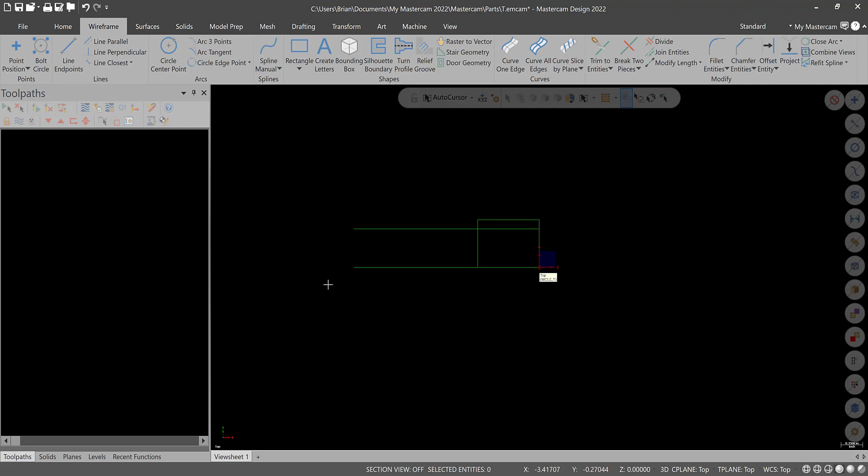Alright, so let's take care of our next diameter. Right now I'm going to go to divide and get rid of this leader line here, and I'll go to offset. Our next diameter is 1.220, so I'll go back into Mastercam. Distance 1.22 divided by 2. So click that up, apply, green check, and then let's take a look at the face. It looks like it's going to be 1 inch from this side or 2 inches from this side. So since I have this line drawn, I'm just going to offset it 2 inches from the right side. So I'll go to offset 2 inches from here to here.

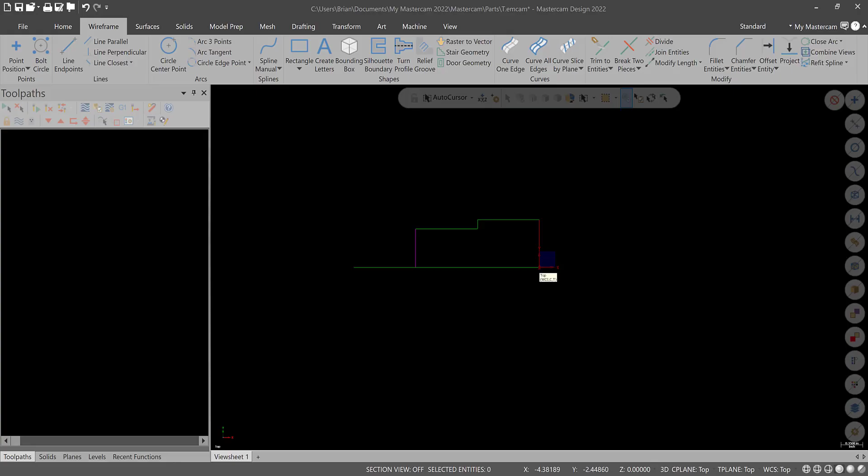And then I will go into divide and start cleaning this up. I will also clean up these details here so it sort of looks like our workpiece. Green check, and let's take a look at our next diameter, which is going to be 0.845. So 0.845 divided by 2, and offset this line up here. I can clear colors, finish up by just drawing this line, which we're going to be messing with in a minute anyways, green check, and then divide and clean up the inside of the workpiece. So now the OD is done and ready to be revolved, but we need to take care of the ID.

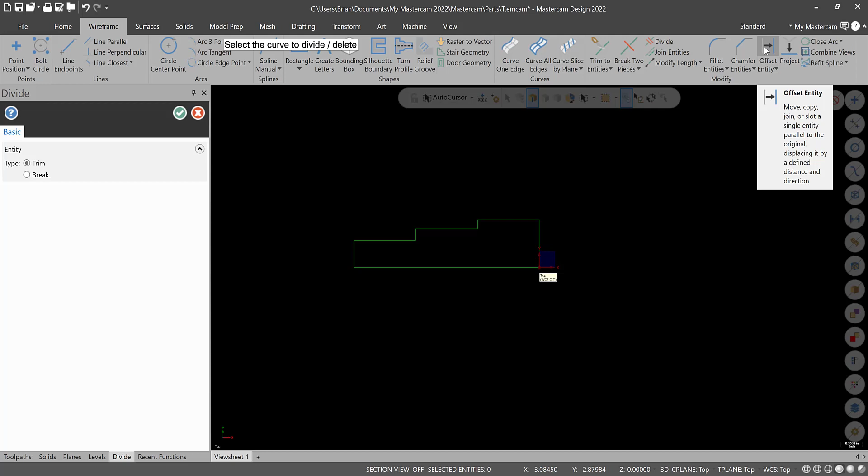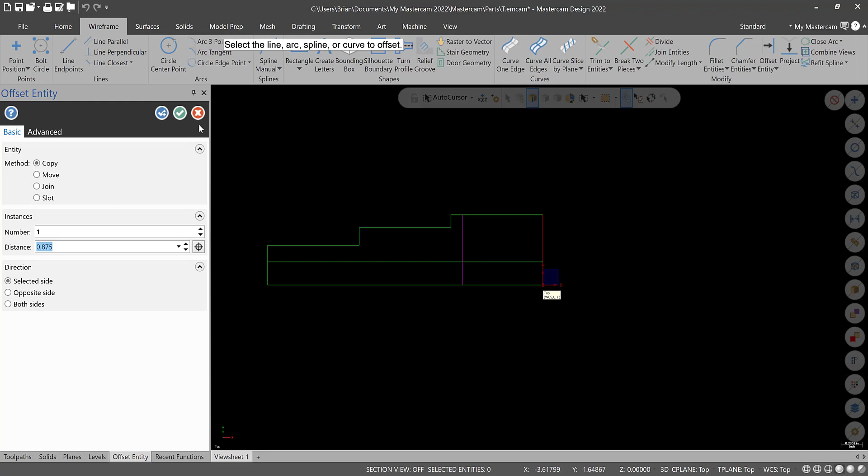Okay, so let's take care of the 1/2 inch hole first, because that's all the way through. So we'll go to offset and we'll type in 0.25 and offset this entire line up, green check. Alright, now I'm going to take care of this depth first. So the depth of this pocket is 7/8 of an inch. Okay, so we'll go offset 0.875 from this edge, and then we will offset up the diameter, which happens to be 1 inch. Right here. Alright, so we'll offset that up 1 inch.

The only thing I'm going to look at here, I do have to add this chamfer, but this R.40 max, we'll create that with the insert we select. I don't think any inserts in the shop are greater than a 32nd of an inch, so we're not going to end up drawing that in. We'll have to take care of this chamfer though. So we'll take care of the hole diameter. So we'll go to offset 1/2 inch, here to here, and then we'll use divide to clean up our geometry.

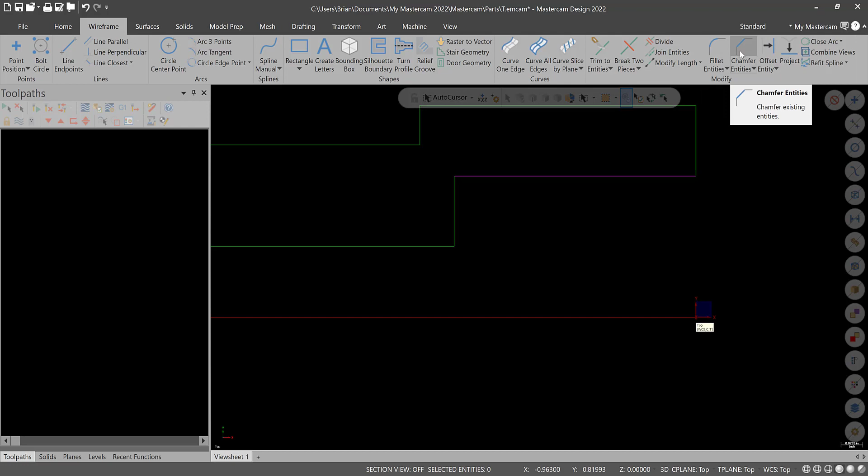So that is going to be what we're looking at. Last thing is this chamfer. So we'll go into chamfer entities over on the right here, and one distance is fine. The distance is going to end up being, if we look at the detailed view, 40 thousandths by 40 thousandths, so that's good. So that means that we can use one distance, that'd be 45 degrees, which works out.

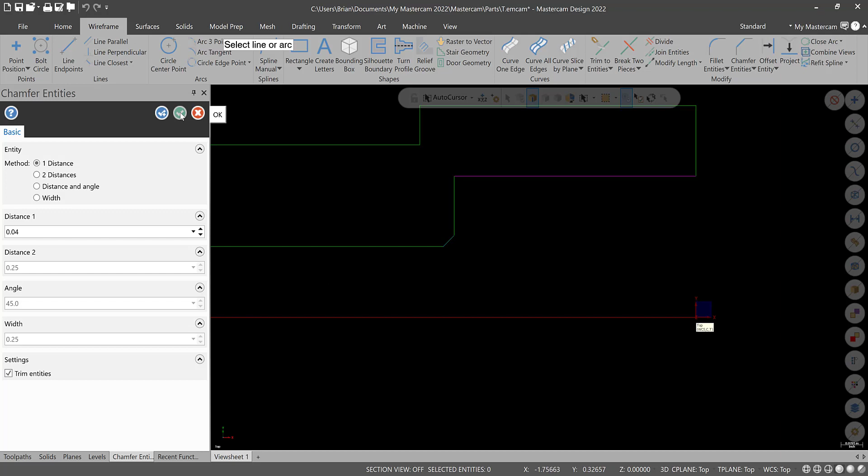So we'll type in 0.040 from here to here. Alright, and we'll hit green check. So that should be right. You could always check this stuff. Again, you could right click, go to analyze distance from here to that point, and we can take a look over in the specs here. It's 40 thousandths.

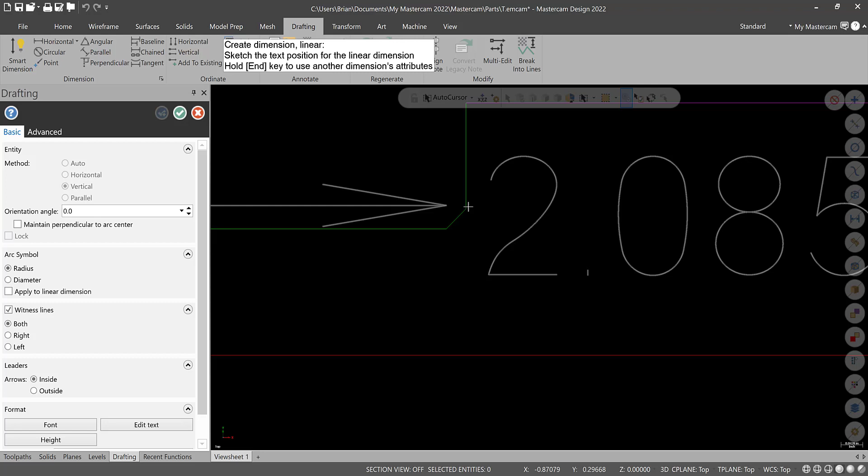All right, the other thing you could do, if you don't like working with that, if you go to drafting, you could force it to vertical from here to that end point. And if it doesn't snap, like it's not working for me, sometimes you can end up just going to vertical, and make sure you select the end points from there to there. 40 thousandths, so that's correct. And you could leave those on sometimes if I'm working with this. It's not often, but with drafting, usually I'm using angular a lot.

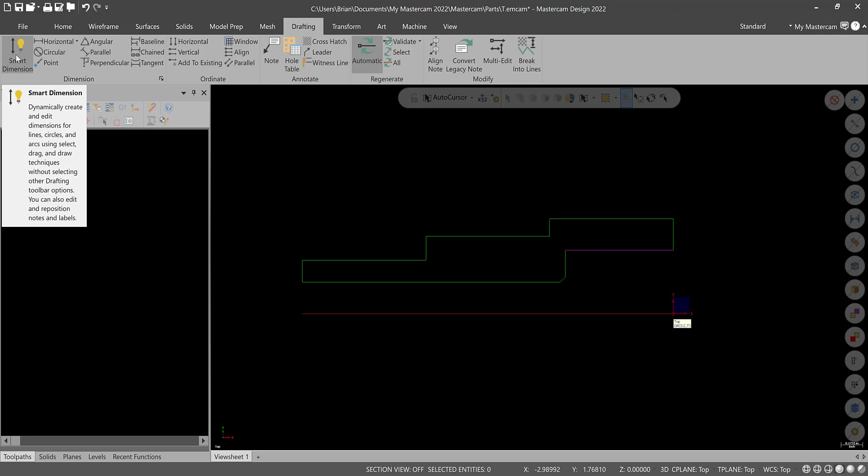But you can go in here. I also use a hole table as well. But you could leave these on a different level to help you in your part process. Not something I do a lot. It depends on the situation. But don't be afraid to use these. You can consider drafting sort of like, it's not like smart dimension. Even this smart dimension is not quite. It's not like SolidWorks or a parametric program or parametric type modeling. It's just not like that. I don't end up using that a lot.

If I want to change the length of something, you should just right click and analyze entity properties. You can update it in here. But even then, sometimes it is faster to delete it. It depends on your methods. So I wouldn't quite worry about that, especially with something this simple. So that looks like that's pretty much right. I don't see anything I'm missing. So let's get ready to revolve this.

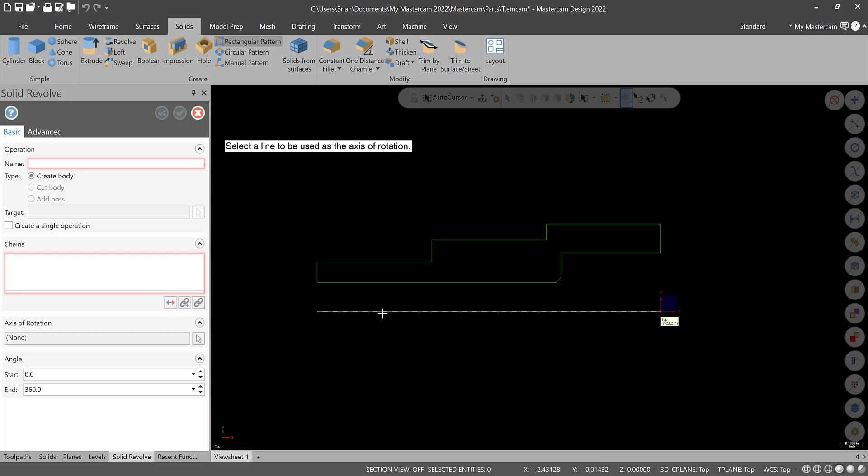So what we need to do is go into Solids, Revolve, and we're going to select this outside, okay, and hit green check. And then the next prompt is select a line to be used as the axis of rotation, which is the center line. And we get a good preview of what we're going to be doing. So that looks good. We will now hit green check. And this workpiece is essentially ready to machine. So we'll put a little transition here, let you catch up, and we'll come back. We'll probably start by flipping this around and start to get into our toolpaths.

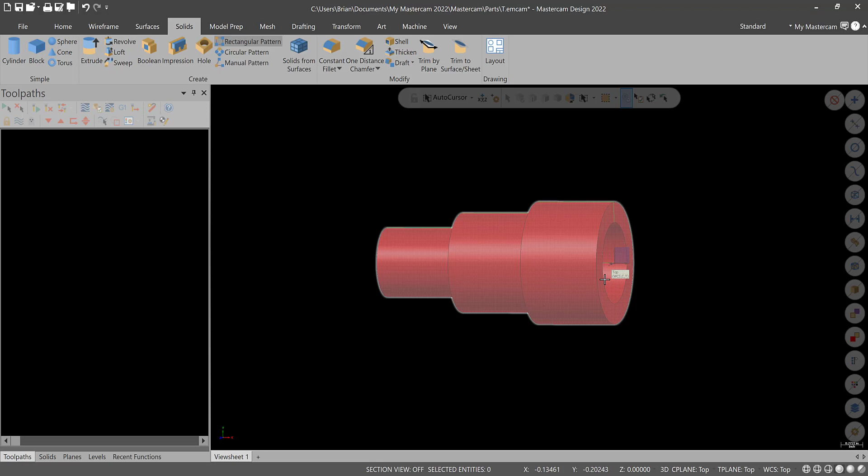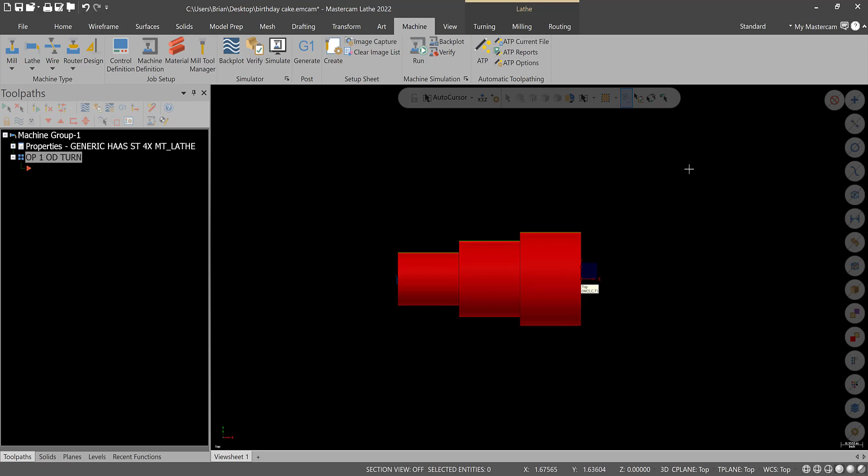Alright, so let's get ready to turn this. You'll see I already have a machine group. I selected the generic Haas ST 4-axis lathe post. That is available on Blackboard. Machine, lathe, make sure you get the generic Haas ST. Don't use default. This will be fine for what we're doing, tool room lathe or the turning center. They take the same programs. We're going to be programming like a turning center though, so from the back side of the workpiece.

So for turning this OD, I just labeled my first toolpath group as Op1 OD turn. I also have my levels set. I want to set the solid as level 2 just to break it up. So this will be part, and level 1 will be wireframe. Okay, so I'll hide the wireframe for now. We don't need that. So let's rotate the workpiece around.

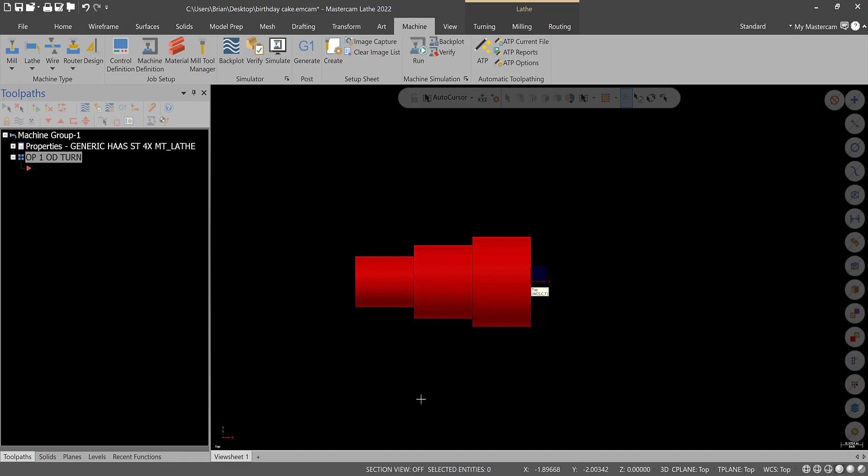So select the whole workpiece, and actually before you do that, make sure you got the wireframe too. So select everything, because you don't want to lose that. That'll give you one of the errors in the solids. You have to remove solid history and all that kind of stuff. So let's just move it together for this example. Go to dynamic, select this side, rotate the part 180, and then bring it over in the X, -3 inches. Alright, hit green check, that's what we're looking at. Alright, clear colors. And then I am going to go into levels and turn off the wireframe.

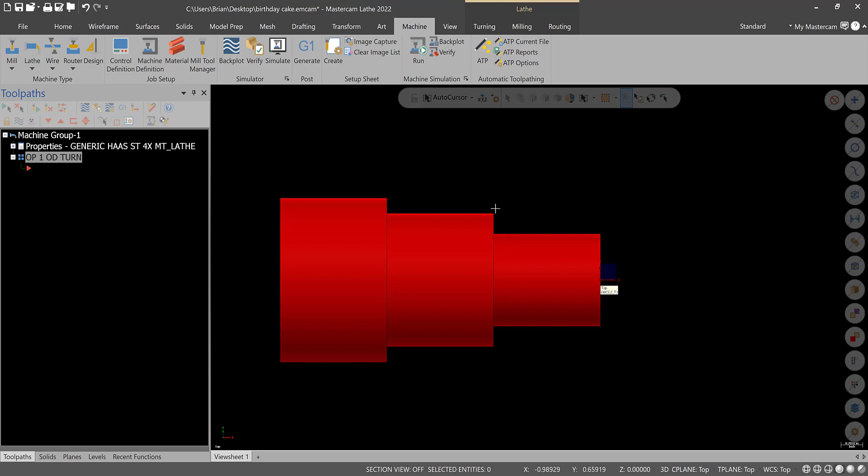So for right now, we need to think about not only our stock setup, but also, I like to deburr the workpieces in the machine when I can. And one of the simplest ways to do that is to draw the chamfers or radii on the workpiece. So what we're going to do is draw a little radii, 15 thou radii on each of these corners. So we'll go into solids, we'll go into constant fillet, select the diameters, not like that one. So go back into constant fillet. You could have hit clear selection, but I hit escape out of habit.

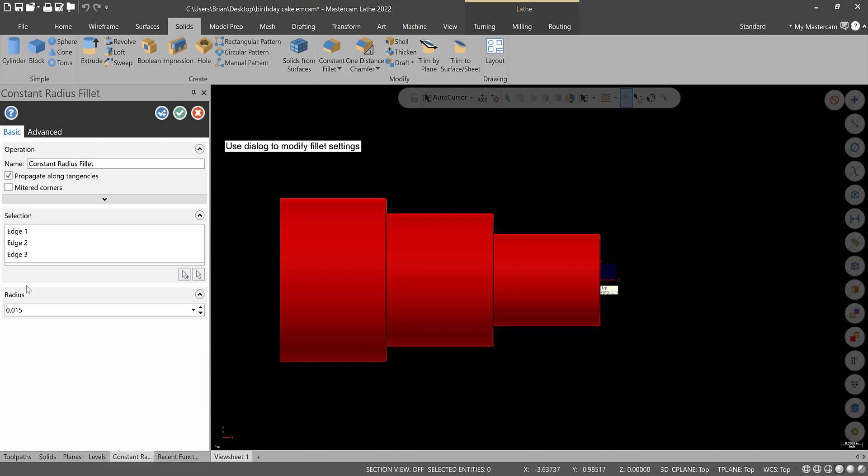Then hit end selection. And the fillet's going to be 15 thousandths. Okay, that's green check. So now we have a part that will be deburred after the finish pass, nice and smooth. So we'll go to top view.

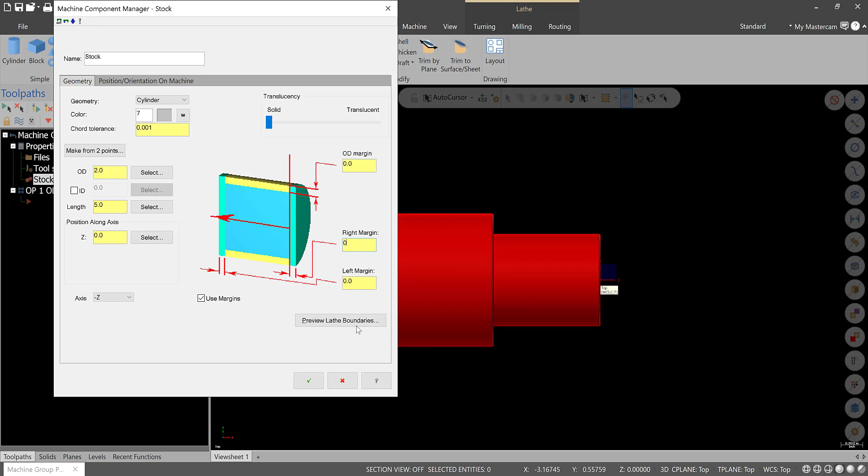So we'll preview lathe boundaries. Looks good because we are facing the 0. So we'll hit green check. Next what we're going to do is go define the chuck jaws. We'll make sure that we are from stock. Gripping on 1.5 inches should work. We'll preview lathe boundaries. That looks good. Enter. And we are pretty much set up.

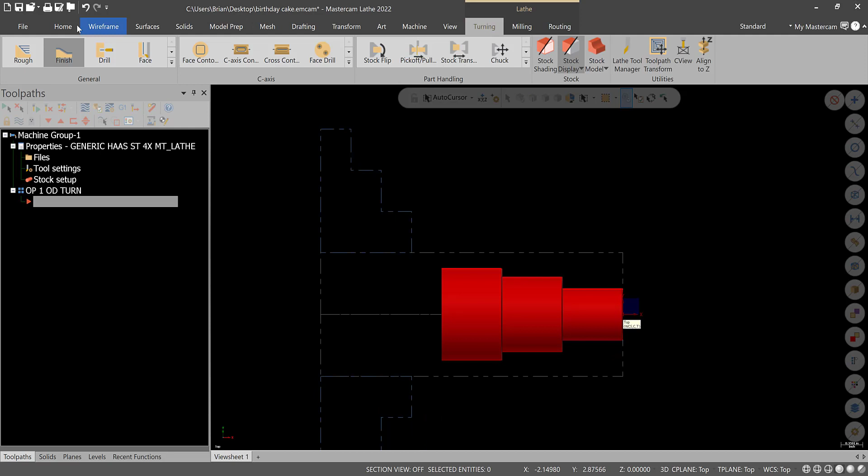So now we'll get into our turning operations. So we'll start with a facing op. We'll select our CNMG 80-degree insert. Spindle speed 200, slow. We'll just go to 500. That's still slow, but it'll be good for people learning how to use the lathe.

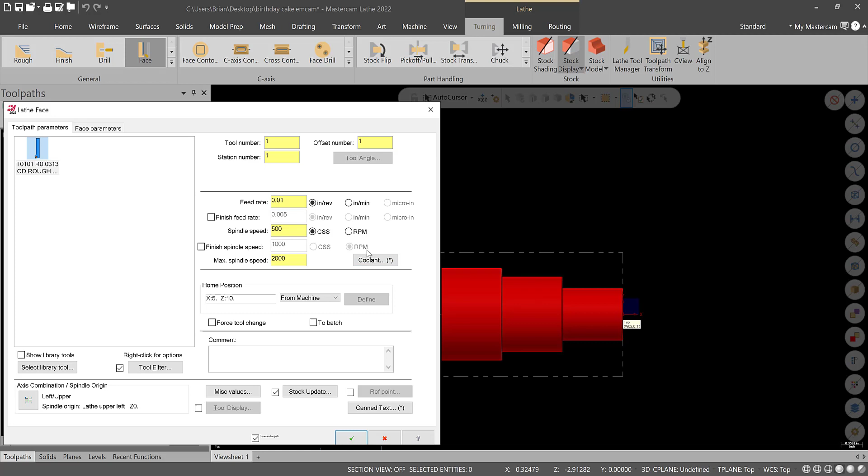Max spindle speed of 2,000. I might even reduce that depending on when this is assigned in the shop, but for a programming class, that is fine. Feed rate of 10 thou should be okay for us. I don't think we'll get too choppy of a finish. It is only aluminum. Coolant's on, that's good. Facing parameters, everything there should be fine. We'll hit green check. There's our facing op.

Alright, so let's rough the OD of this workpiece. So we'll go to roughing operation. We'll carefully select the first radius, change direction, and bring the chain over to the end of the workpiece here. Hit green check. Use the same tool. We will limit our max RPM to 2,000, spindle speed of 500, and feed rate of 10 is okay for this roughing op.

Rough parameters. We'll do a 50 thou depth of cut, and minimum depth of cut of 1 thou. We're just going to use equal steps so that it won't affect us. We'll leave 10 thou on X and Z. We'll have to be careful of the Z later on with the finish tool. I'll show you why. First thing, stock recognition. Make sure that is use stock for outer boundary.

Lead in and lead out. The lead in is probably going to be okay. The lead out, I want to extend it by about 1/4 inch to allow for the parting tool. Not a big deal, but it does help. Otherwise the parting tool could hit the shoulder and things like that.

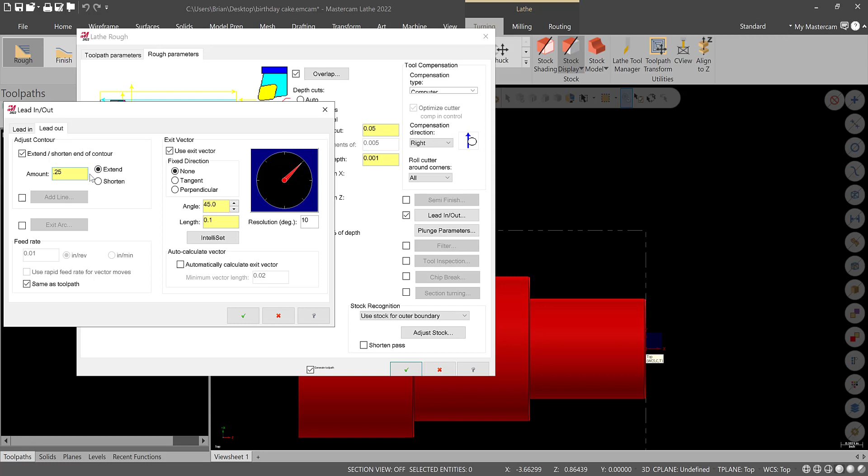I end up thinking if you're going to part it off and you're turning from a larger piece of stock, you want to part off the turned material, not necessarily from the OD of the stock. I don't know why you'd want to do that, but there's a lot of variables here, so this is what we're going to do for this one. So lead in, that's fine. That should be good. We'll hit green check.

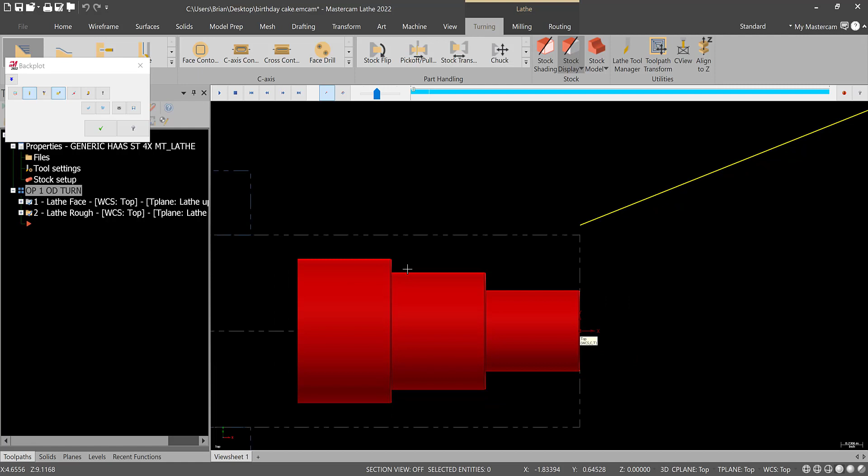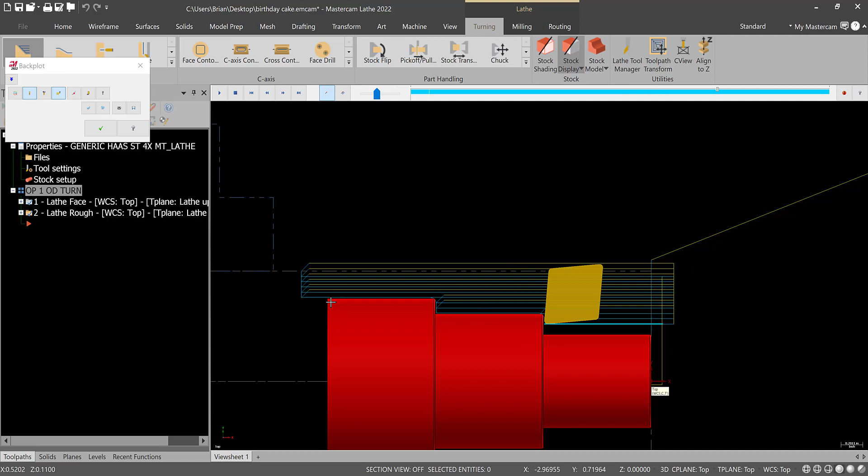Alright, looks pretty good. We'll watch both of these run in back plot now. So here's our facing op. I'm going to slow it down so we can actually watch it. Here's our facing op. Sometimes you pause and I just go S. S and B. So that looks good. Roughing past the workpiece. That should give us room for our parting tool. Looks good.

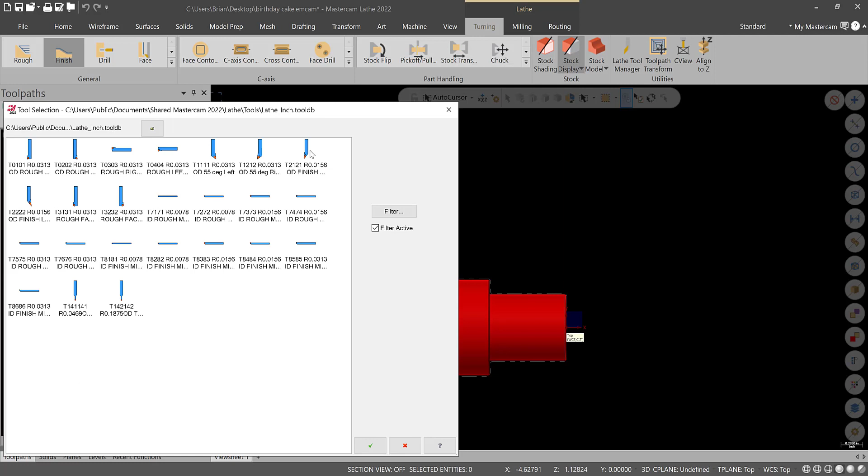So now let's do a finish op. So I'll hide the visualization of those two tool paths, and I'll go to finish. Same chaining as the roughing. Green check. And for finish parameters, for the finish tool, I'll use this 35-degree tool, just to have a tool change in this operation. Spindle speed, constant surface speed of 500, max 2,000. We'll go to a 3 thou feed rate for finishing. Everything here should be okay.

The only thing that's going to change is going to be lead in, lead out. The lead out will extend it, but only by 0.240. And the reason for that is we go 250, since we left 10 thou on the faces. And actually, let's just turn that off for now, and I'll show you that. So we'll hit green check, and let's change that to 250.

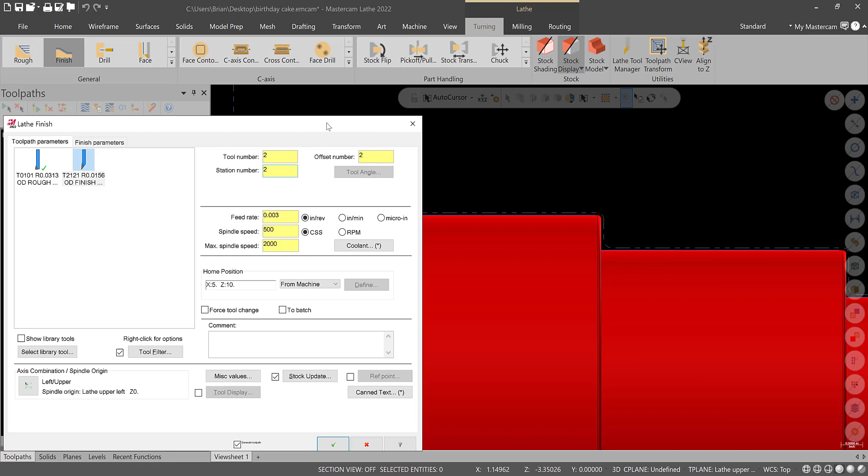That's what we did with the first one. So let's make a match 250. The other thing I forgot about, this needs to be tool 2, so sorry about that. And station number, I would make a match. We don't have station number issues with our lathes at the college, but that'll work for us. Green check. So notice the tool is actually going past a little bit.

So if we go into home and analyze tool path, and you'll see, if I move this thing out of the way, look how far the tool is going into the stock. See how it's gouging? It's going to squeal. That's a common mistake people make. That is because in the roughing we left 10 thou on the faces. So if we go back to parameters and lead in, lead out, change it to 240.

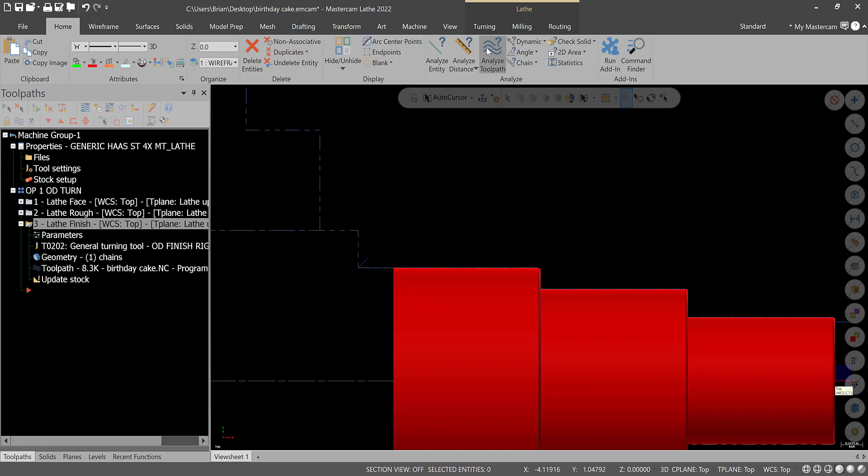And then if we go to our analyze tool path and put the tool right at the end, you will see that where the tool's doing the work is lined right up, right there. Okay? So that's important. It's not the end of the world, but it does make a difference.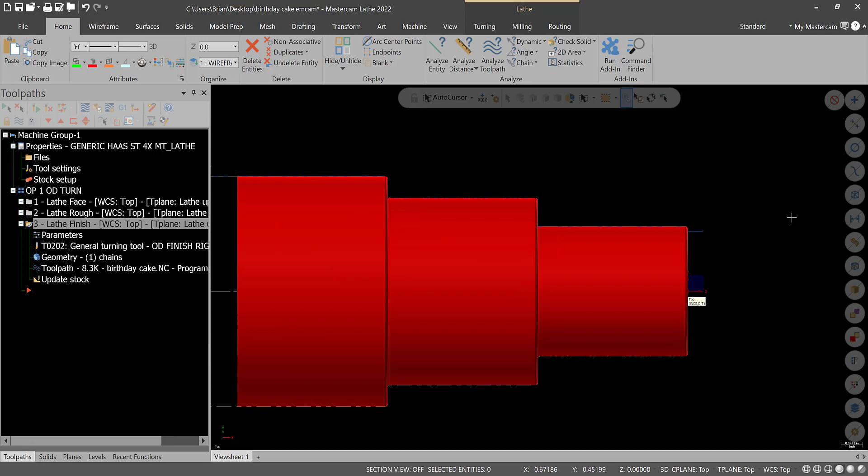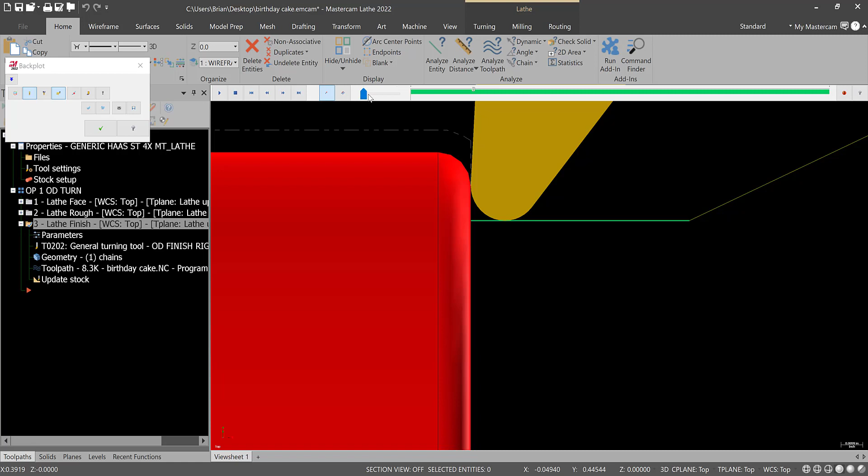So we're good there. Okay, actually, if we look at this tool path, and just look at it in backplot to make sure it's flowing right. So it goes right to the edge, works around the workpiece. If I slow it down, you can watch it run. Looks good. Alright, now we could change the lead in and things like that, but I think it's okay for this operation.

So this part is turned. Let's take care of the parting. I'll transition here. Alright, let's take care of the cutoff operation. So go to turning, and we'll go to the cutoff op. And I want to select the boundary, but you can't just go over and select this diameter because it's going to go to the center and you're going to have crash issues.

So in situations like this, you have two options that I usually use. One is going to be draw a line here and then select the end of the line. The other one is just hit the spacebar and then this little window up here comes up, and then you could type in where you want that point, and you could draw geometry this way. It's sort of old school, but it does work well. The first number you type in is X, second is Y, third is Z. They're all separated by commas.

So we're going to go minus, if this is 3 inches, 3.015. And I want to leave it a little bit long because we are going to face this back side and up too. So leave it a little bit long because we are going to have a spud in the middle. We're going to end up programming this to part off in Mastercam. We would change it at the machine if we were going to leave it attached to break off by hand.

The reason for that is when you work with the stock flip in Mastercam, it doesn't flow well. You can work around it, but it's a lot easier as far as Mastercam programming to, I guess, fake it out, which I don't like to do, but in this situation, it is definitely going to be easier for us.

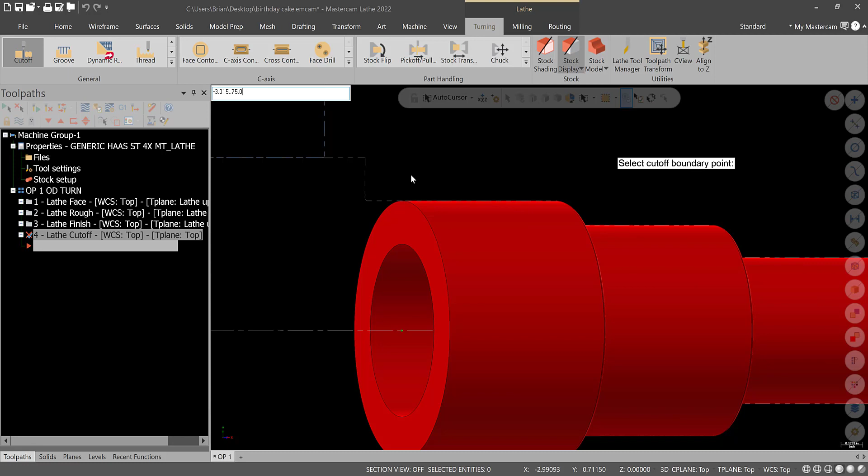So X is minus 3 inches plus 15 thou, comma, in the Y is going to be 0.75, which is the OD of the workpiece, and then Z is comma 0. So hit enter, and you'll see, we move this out of the way, top view, that point is right there. So that worked out well.

Now, for the tools, I have the parting tools selected. So if I get back into the lathe tools, that's lathe metric, lathe inch right there. And I have this cutoff tool selected, 1/8 of an inch. Now, the grooving tools could work.

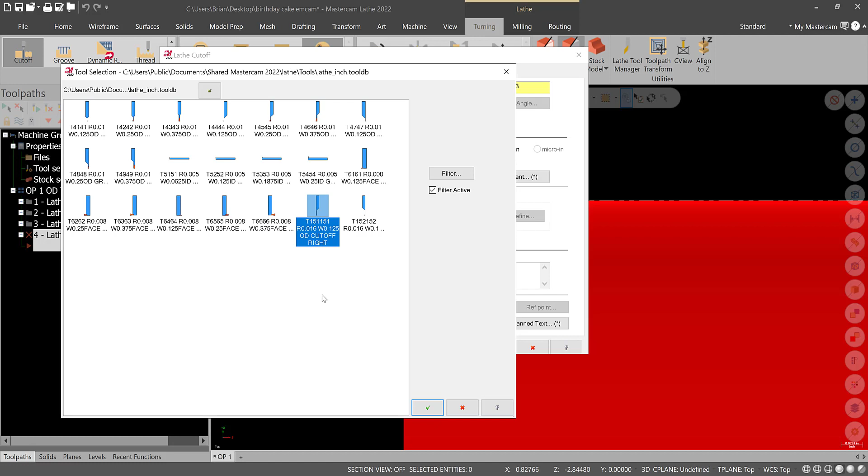The question with grooving tools is typically they're not as long as a parting tool. This part's not that big a diameter, so we can get away with a solid shank holder. Any diameters larger than 3 inch, you really need a blade style holder, and I can show you those in the shop if you have any questions, but this will work for us.

So hit green check, and I already have it in there, so I'm just going to X out of here and just delete that one. And I already renumbered that tool 3. I'm going to go inches per rev, 0.0025, spindle speed, 200 max is going to be, let's say, 1,000. And we are not parting all the way off. When we get to the machine, we'll change the X value in the part off. So 1,000's fine, it won't throw the workpiece.

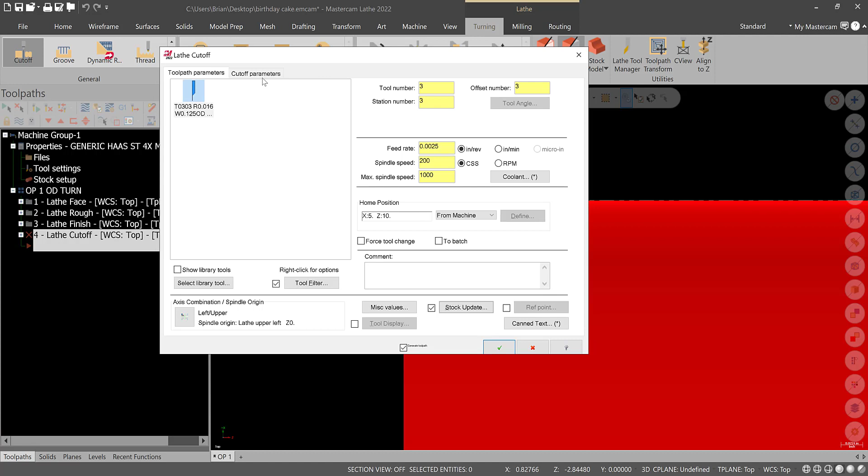All right. So the other thing is in stock update, we want to make sure that we keep the separated piece. That's what we want to keep. We don't really care about the remaining stock over here, so hit green check. Cutoff parameters, everything here should be okay. From stock is good for entry. Corner geometry, we'll put a radius of 15 thousandths. Now I know we're going to end up facing that, but it's nice to not have to handle a burred part. Lead in, lead out should be okay. I'm not going to bother pecking for this workpiece, so we'll hit green check.

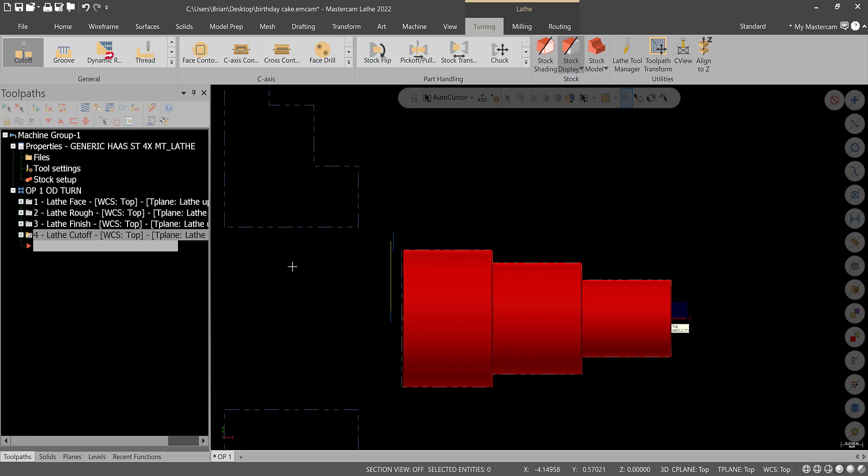And that is what we're looking for. So if we backplot this, notice this part is gone. This is all we're working with. That's the stock. See the gray sort of dotted line around it. And that's the reason why I don't program it to leave the spud. You can, and you could do stock models and work around it. The default jaws don't necessarily simulate right and things like that. So it's just easier to do it this way.

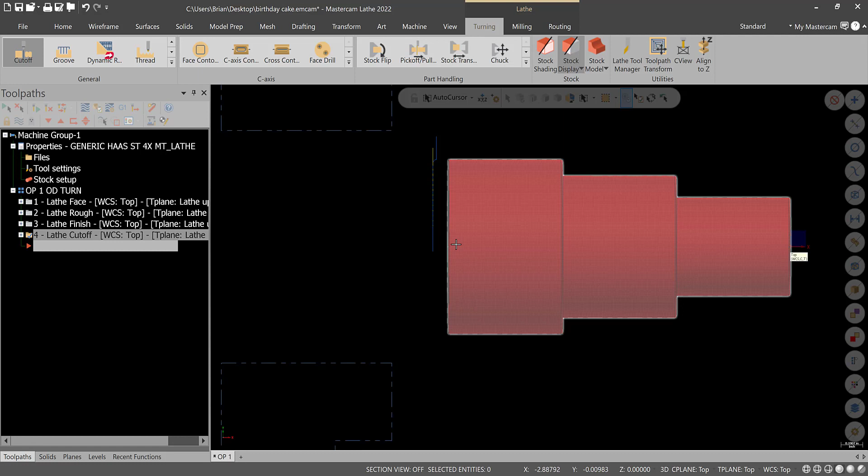And then if you want to break this off, leave 200 thousandths diameter here at the machine. So you would change the X value in the code, and that would be after posting, obviously. And then you can just break it off by hand, and then the same programs work later on. So from a Mastercam standpoint, this is what I would do. I would just change it at the machine tool. So let's go ahead and backplot this. Make sure you don't have any issues. Looks good. So good time to save. And let's verify this now.

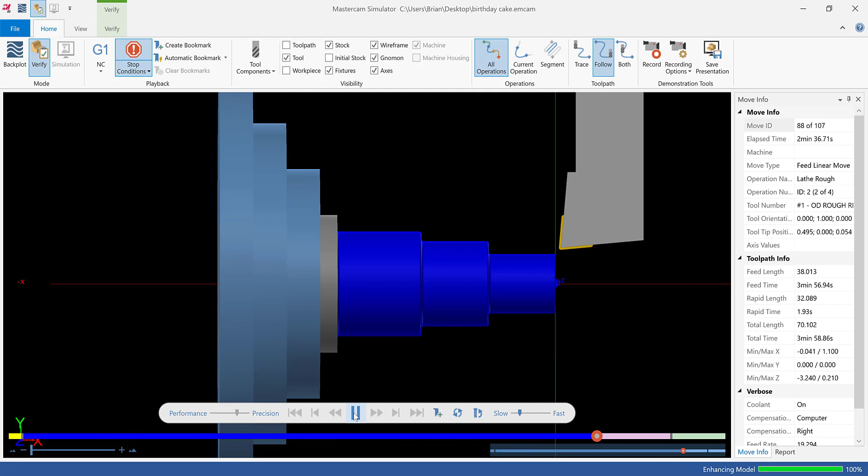All right, so we're in verify. I'm going to slow it down quite a bit, and we'll take care of the facing, the rough turning, finish turning, and parting. So there's our workpiece. All deburred. There are no sharp edges. And now we're ready for our stock flip operation. So again, save again, and I'll transition here and we'll take care of our stock flip.

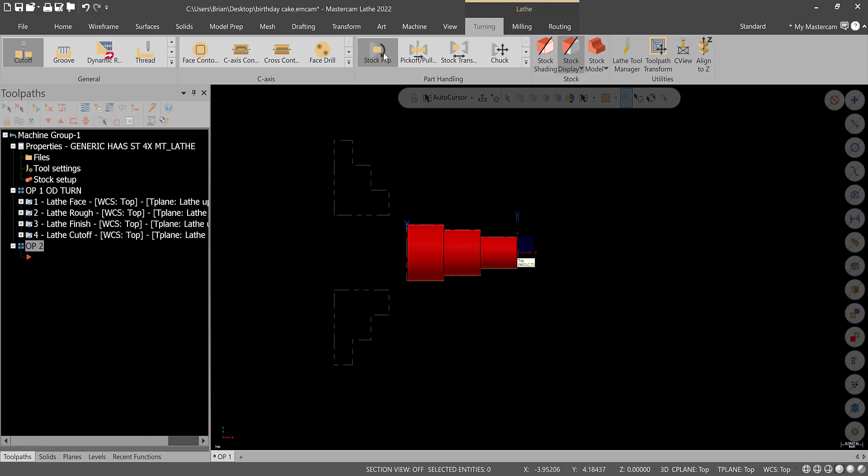Alright, let's take care of the stock flip operation. So let's reposition the workpiece and the jaws. So let's do a new toolpath group. And let's just name it Op2. And then we can go to the part handling operations, go to stock flip. Alright, for the geometry, we've got to make sure we select everything here. So make sure you go to levels and make sure both are on. And I'm just going to window and highlight everything for this one. Offset levels by 10 is fine.

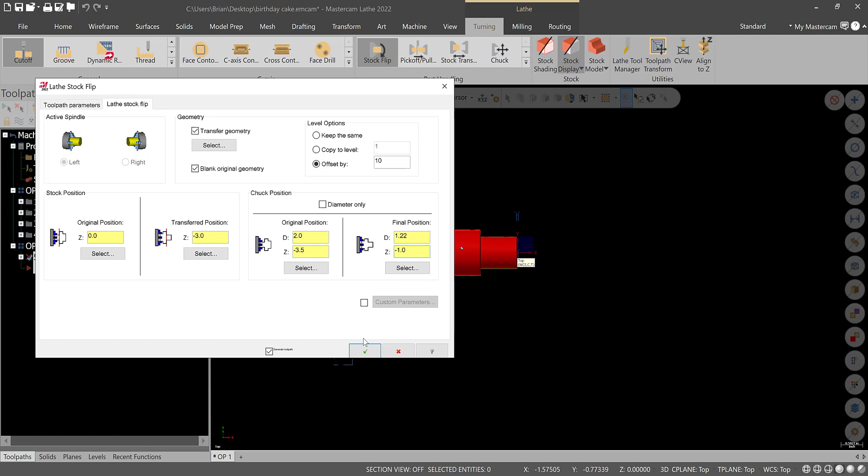The transferred position should be minus 3 inches. We'll double check that. We can always go back and tweak this. In the final position, the diameter is going to be 1.220, and it'll be minus 1.0 because we're going to end up grabbing on this diameter right here. So let's hit green check and see what it comes up with. All right, looks pretty good. That's exactly what we want. Make sure that your top gnomon is on the part and not the stock itself. Make sure that stock is hanging out to the right, because that's going to be what we're looking at. All right, so that's good right there. So there's our stock flip operation.

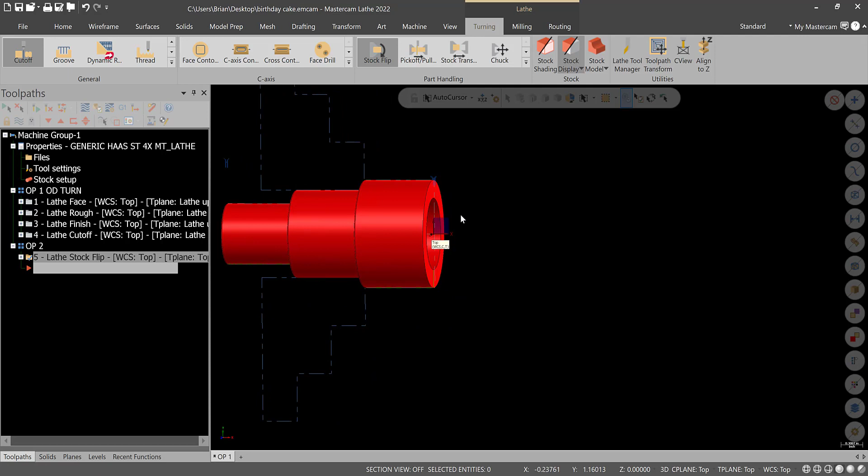Good time to save. And now let's just do a quick facing op. All right, so we'll go to facing. Select that tool 101. The speeds and feeds from last time should be okay. Face parameters should all be okay. It should be the same as last time. Hit green check. We'll backplot this. Looks good. So there's our facing op. So there's our stock flip and face op. Good time to save. And I'll transition here, just allow you to get through the stock flip and the facing. Come back and we'll spot drill, and bore this hole and finish up this workpiece.

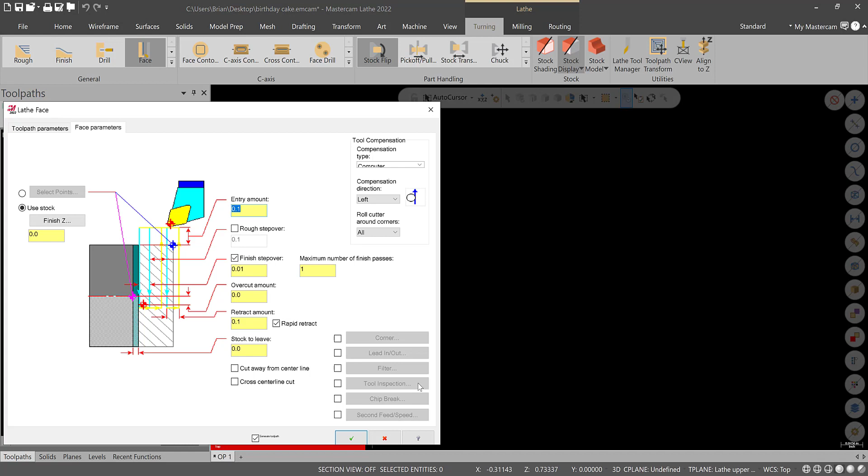Okay, so one thing I forgot to do on this is take care of this corner, because I want to deburr that. We don't have to draw geometry in this situation. We can go into the lathe face operations, go to corner, and we'll put a radius of 15 thousandths. Make sure it looks just like that one, and then hit green check. Okay, and let's watch this run.

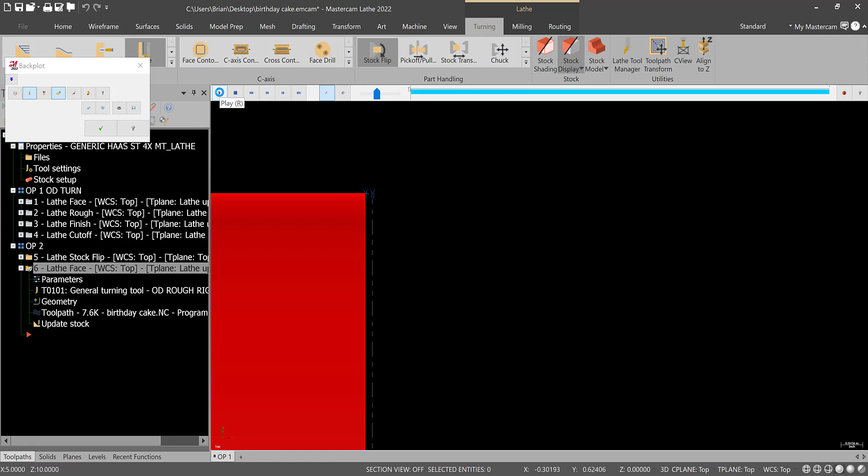Actually, I'll stop and hit S. See how it forms the radius? If we go to wireframe in the bottom right, you'll see it form the radius. That's what we want.

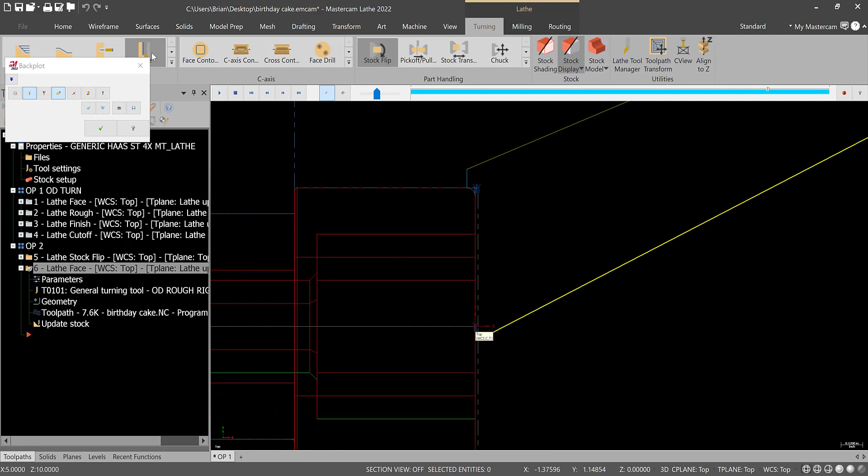That'll deburr the workpiece for us quickly. All right, it's just something different there. Go back to solid.

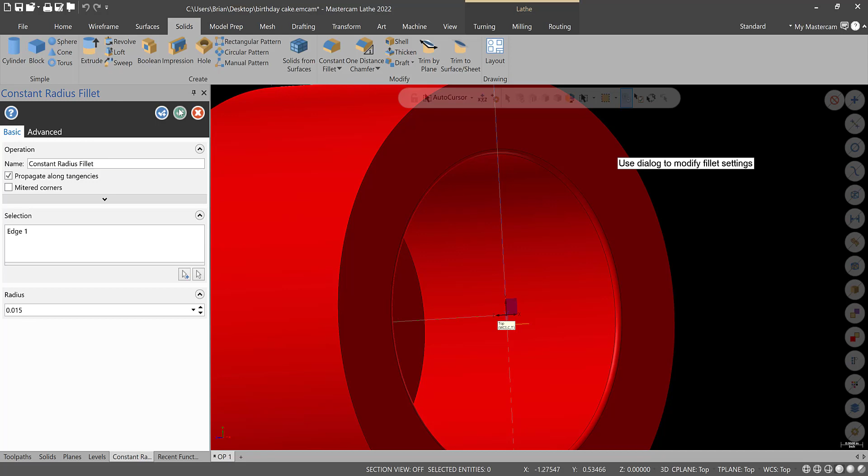Now we got to start thinking about, while we're on deburring, what we're going to do with this corner here. I'm going to end up modifying that in solids. So in solids, I'll go to fillet, and this will end up being 15 thousandths. Hit green check. Now we have that done as well. So we just took care of the deburring for this operation.

The only thing we're not going to be able to get is this hole. We could have done that hole in the beginning and then deburred this corner with a countersink or something and then came in here, but it's not worth it. We could do this one hole by hand. It's just trying to make an effort to deburr while you're in the machining operations.

Now that the facing's done, let's take care of the other op. We'll go to turning, drill, and I have a 3/8 spot drill already in there, but again, go to select library tools if you can't find the spot drill you want. See how they're not there?

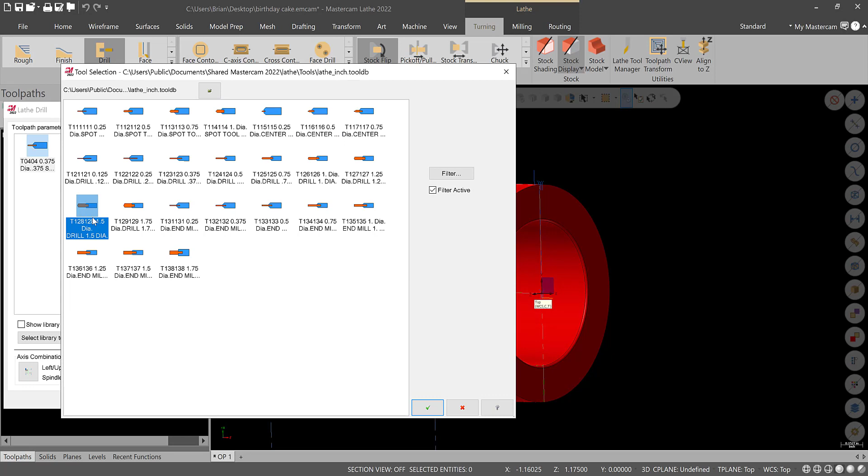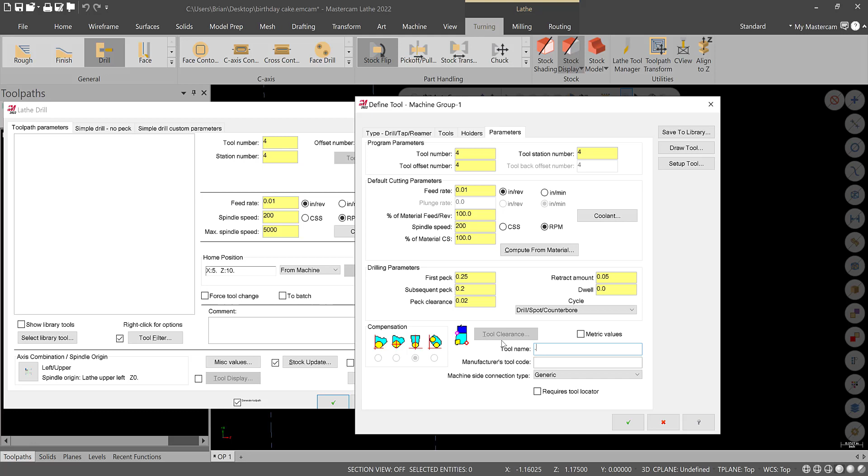What you can do is, I'll just delete this for now. You just right click and create tool. This is going to be a drill. Name it 3/8 spot, 3/8, 3/8, 1 flute. It's a lathe with inches per rev anyway, but that'll work for us. 118 degree. And in parameters, make sure the tool name here is 0.375 spot. Then tool 4 is fine, and we'll hit green check.

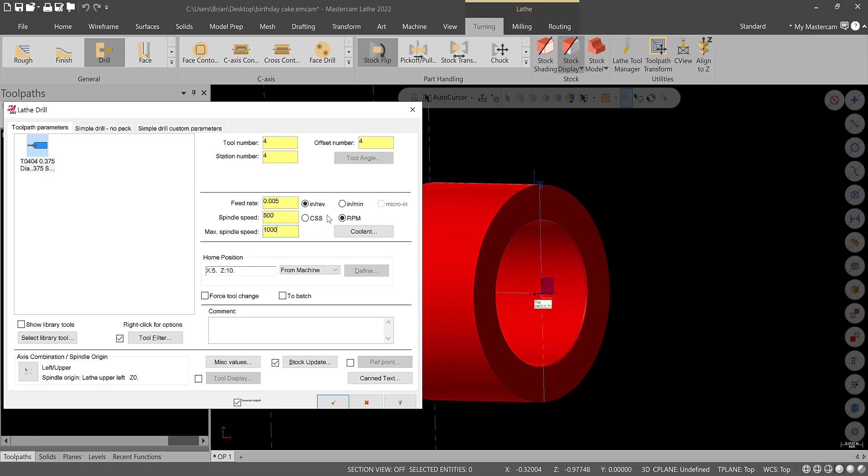So we'll end up going, let's say, 5 thousandths per rev at a constant RPM of 500 to be okay for us. Max spindle speed will cap at 1,000, although we should not have an issue there because we are at standard RPM, which should be G97 instead of G96 for constant surface speed. So we'll go into the drilling parameters. The depth, we'll do a finish diameter of 0.360 and overwrite it. That's good, everything else should be okay. So we'll hit green check, and it looks good.

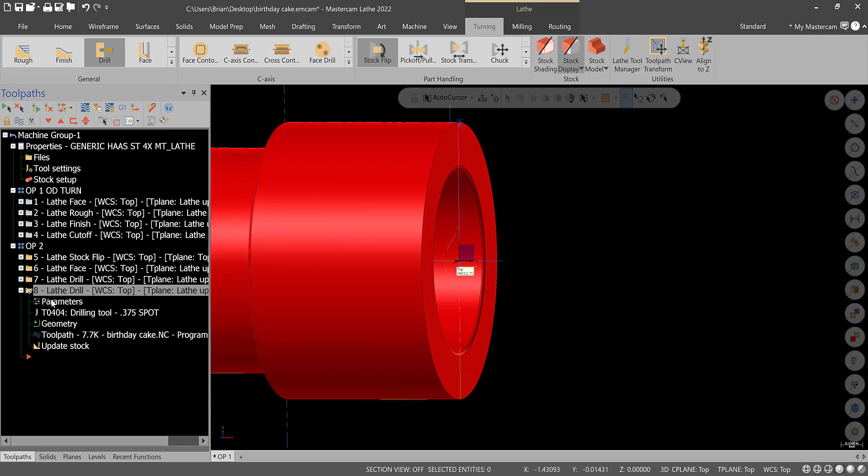Okay, let's copy that operation and change it up so we're using a drill. So we'll go in here, go to select library tools, and let's take a look at what we have. There's end mills, drills. There's a 1/2-inch drill right here is what we'll use. So we'll hit green check.

And then in here, we got to make sure that the tool is the right size. So again, one flute, that's just a habit. It doesn't make a difference for us too much, but it's a habit. Looks like the cutting length is 375, 4 inches there, 5 inches there. This should work fine.

So out of the holder, it looks like this is our number here. So the holder is 5 inches, so it looks like we're 3 3/4 out. Again, that should work. All right, so just gotta watch your tool stick out here. So we'll hit green check.

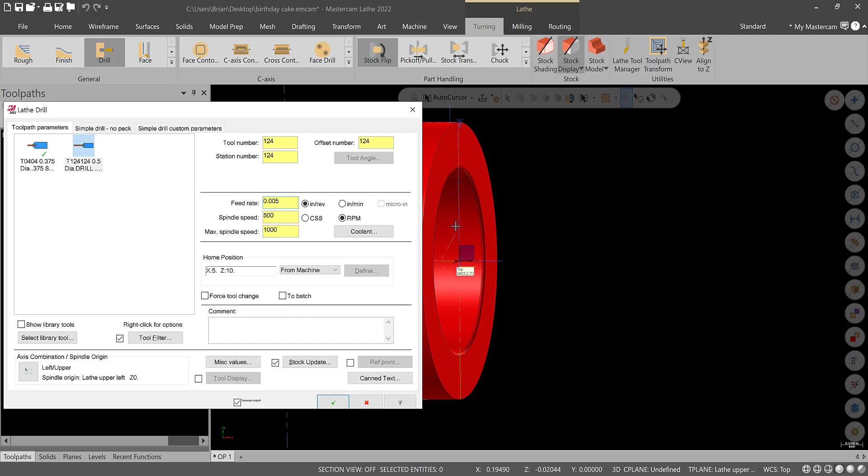These speeds and feeds should be okay. Again, it was aluminum, we're not worried about anything totally optimized for a learning environment. As long as you're not breaking stuff, I'm happy. So that's fine for this.

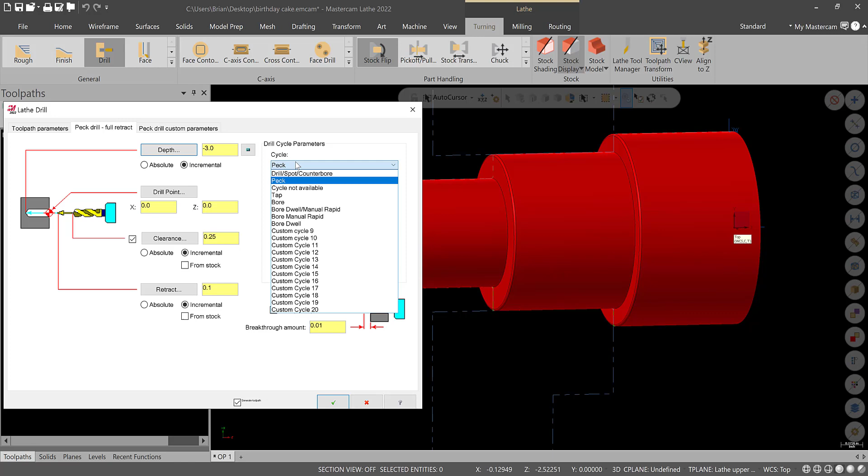So we will go to a peck drill cycle. The first peck, let's go 100 thousandths. Everything else, depth, we'll select over here. And then make sure we drill compensate, breakthrough amount of 10 thousandths, something a little bit. Everything else is okay, I'm not worried, just looking in here, we're good there. Then hit green check, and then we can watch this operation.

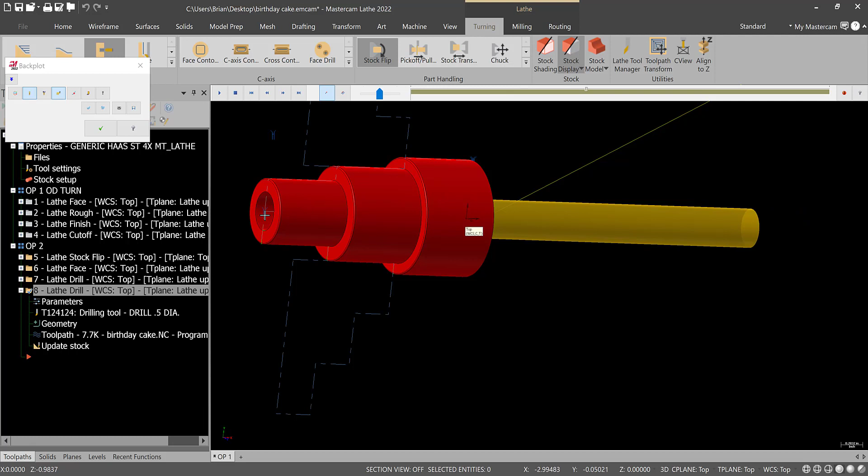Notice it goes through. So let's watch the drill operation, not the spot drill, just the drill. Make sure it goes through the workpiece. And again, instead of watching, you can just hit stop and hold S.

There it is, breaking through 10 thousandths. Okay, so that looks okay.

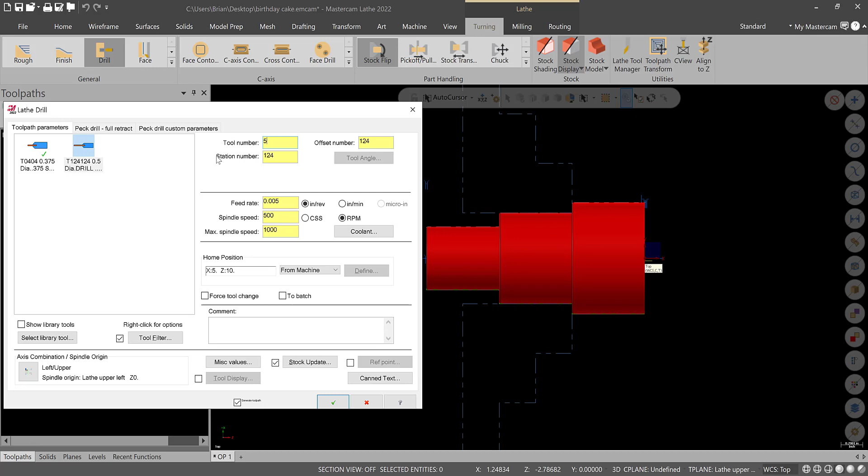One thing I forgot here is in the lathe drill for the 1/2-inch drill, I need to change the number to tool 5. I want them sequential. I could have had that in the initial parameters, but it's just as easy to change it as you go. So that's good.

Let's now cover, before we get into the boring, how do you go between ops in case we get out of order here. Let's say you want to go back to the first op. There it is. What are we missing?

The geometry. The movement of the stock and the jaws occur by where this red cursor is. What about the geometry? That's going to be a view sheet. So let's go back to op 1.

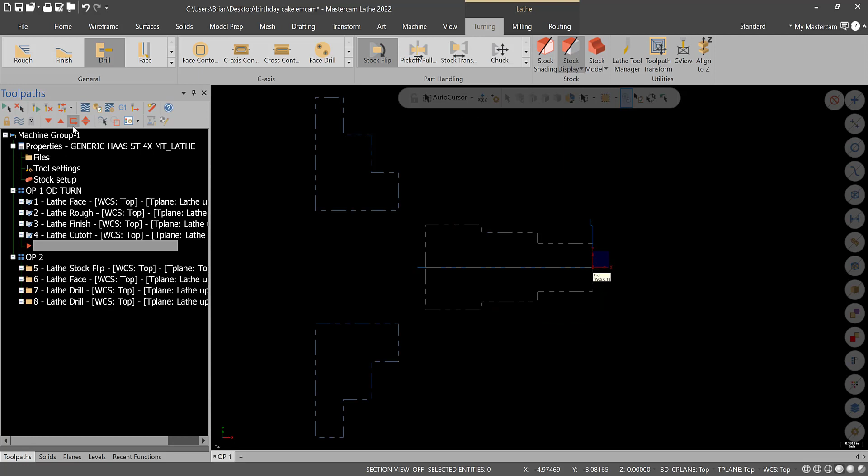Notice how nothing's there. If we click op 1, it is there. But now if we go to op 2, there's nothing there to tell us that. So let's go ahead and turn the levels for op 2 on, these two here, from the stock flip.

Let's do a new view sheet as op 2, right click and save view sheet bookmark. So now what we can do is if we go to toolpaths, we do op 1, there we go, there's op 1. Go to op 2, turn the red cursor below it, op 2 - that's how you're going to go between your operations for this setup.

So go ahead and save, and then let's take care of the boring. We're going to go to a roughing operation.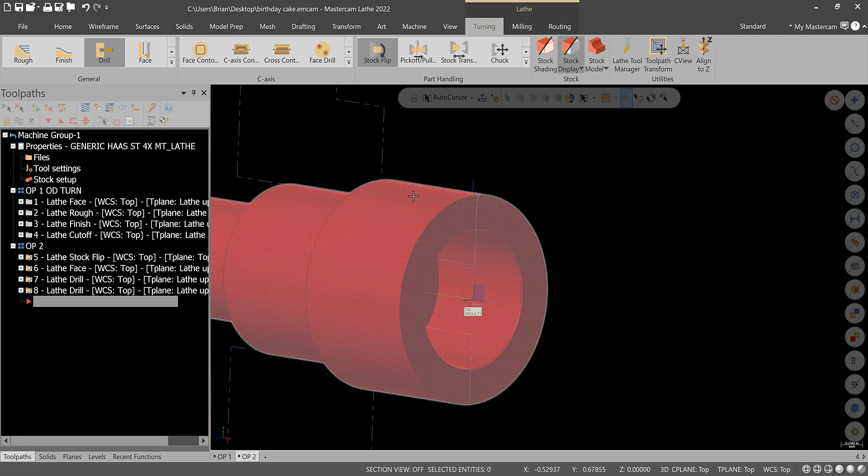Let's take care of this radius, this way, and work our way over. And if it doesn't let you, you can click over here, or click the right direction, which I was not - see how I got double there? Be careful.

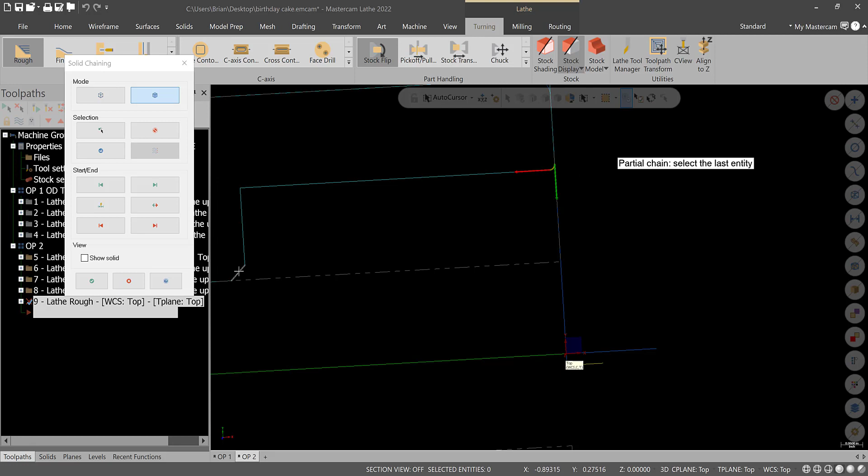So here and there should pick up. Okay, so that's good, with a green check. So there's our first op.

Okay, as far as turning, now we go to select library tool. Let's get a boring bar, minimum 1/4 inch diameter. That's good. Okay, so we'll hit green check for this.

That'll give us more room in there. Could use a bigger boring bar, but this is fine for us. So let's make this tool 6.

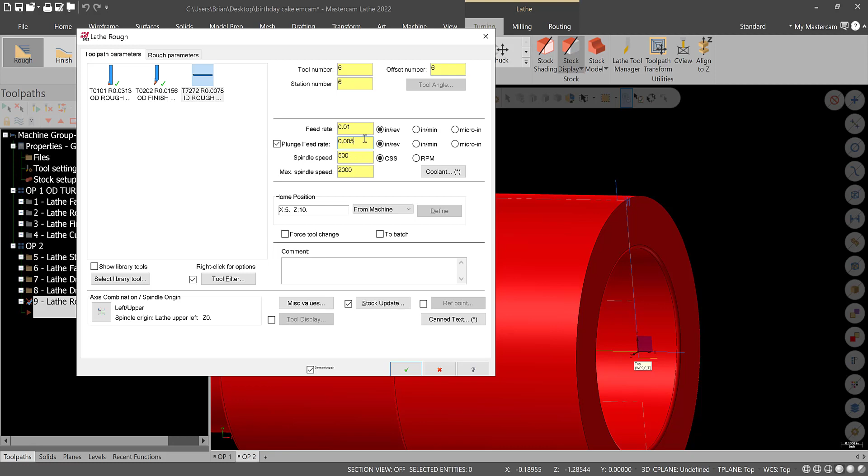For speeds and feeds, the spindle speed, constant surface speed, let's go 500, slow it down a little bit. And we'll go max RPM, 2000 is fine. Feed rate's fine - let's go a feed rate of 7 thousandths for this.

Let's go to rough parameters. Depth of cut will go 0.025, just take it easy, in case it's your first time running a boring bar on a CNC lathe.

Stock to leave is fine. Use stock for outer boundary is fine. Lead in, lead out - let's lead out, extend it by 20 thousandths. And hit green check. Then hit green check again.

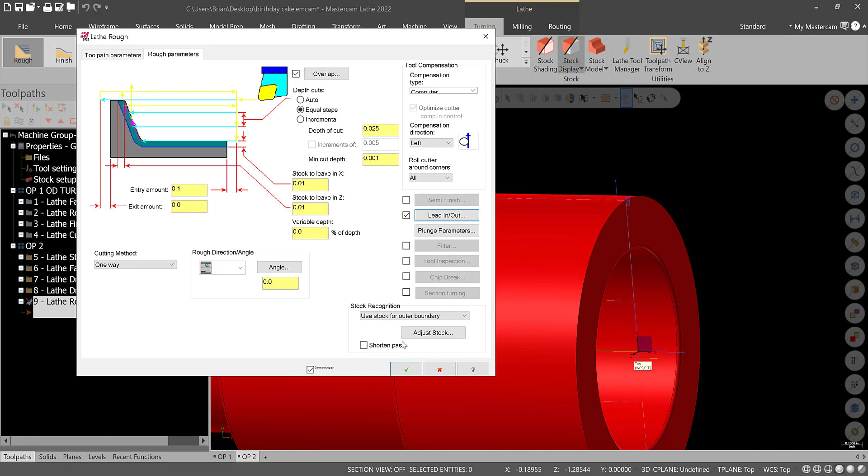Okay, and we could take a look if we go to the wireframe view and we can see our toolpath. If we go to backplot and hit play, speed it up a little bit. You see it roughing the bore. Okay, looks good.

So let's take care of the finishing. I'll turn that visualization off, go to finish, select here and here, or again you can use the arrows, hit green check. We're going to use the same tool in this case - if you're on TL, you'll thank me, you don't have to change the tool manually.

We'll put the feed rate to 0.003 thousandths, increase the spindle speed to 500, or let's say 600-ish, just a little bit - max is 2,000, so just increase a little bit. Mostly it's a feed rate reduction.

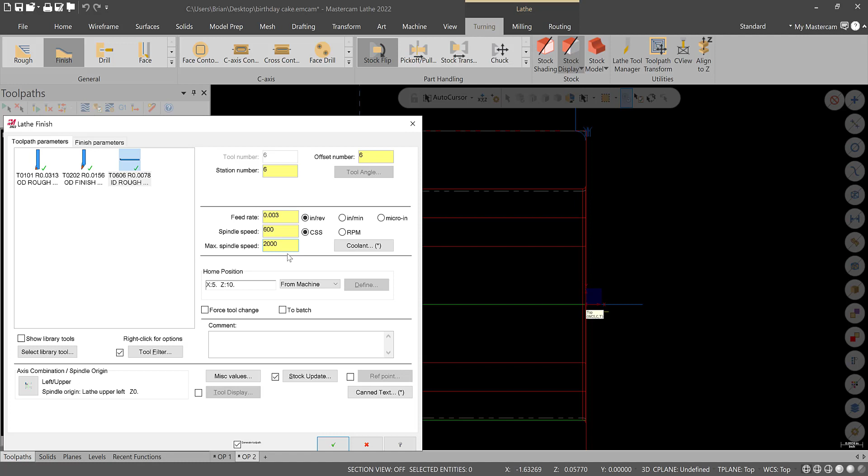Again, these are not optimal - we could be cranking aluminum, but since this is the first example we do for the lab, I don't want people being too intimidated. I'd rather have the part come out correct.

So finish parameters are fine. Lead in, lead out - change the lead out to extend it by 20 thou to match the other op. Again, we're going into air this time, so it's not like the same situation with the OD turning.

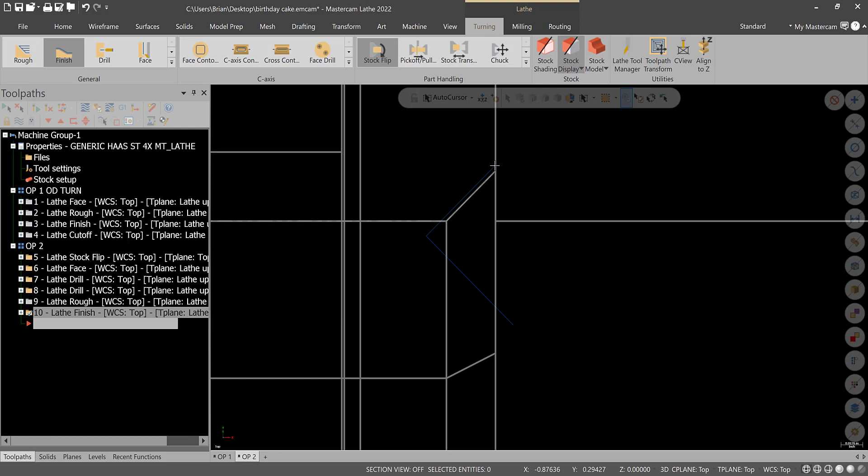Green check, green check. Notice we are going past the op - again, don't worry about the blue line being compensated in. That's just tool nose radius compensation occurring.

So if you're used to hand programming, you know how cutter comp works in the lathe, and that's exactly what's being compensated automatically because we're using computer comp.

Hit green check. One thing to bring up is you need to make sure you're using the right inserts. If you open this and look at the insert as far as the corner radius, that's what matters. The corner radius of the insert is very critical because it's compensating for that tool nose radius. Just like a hand programmer, you got to tell the machine what it's doing as far as your offsets, and the direction of the tip. This is doing that for you, but you got to give it the right information.

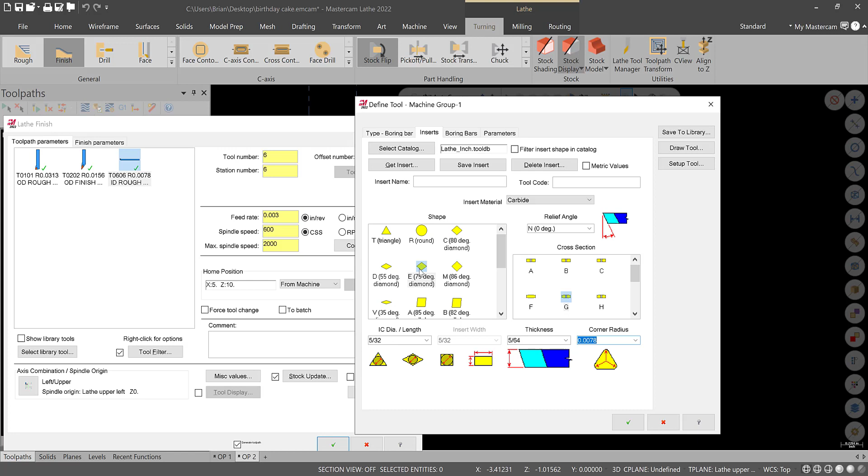I don't really get into too much of that here because we're not in the shop yet. Just know that you need to make sure your corner radius on the insert matches the insert geometry to what you're doing. It's not a big deal because there's a lot of different boring bar options in the shop. Just know that if you're in a lab class running this part, the tooling, just like on the mill, is very critical—even these OD tools, especially with the radii we have going on. So just be aware of that.

So there's a boring bar, green check. All right, I'm going to hit save. Let's get ready to verify this and take a look at some stock flip manipulations.

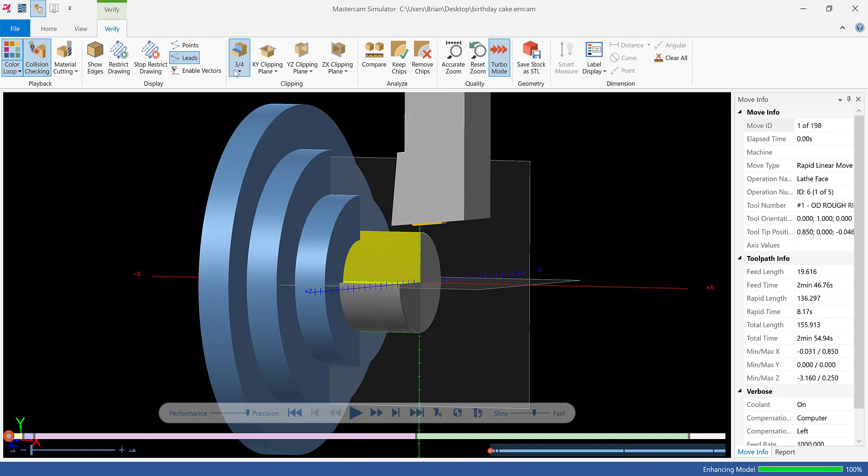So let's verify this. First thing you want to do is make sure update stock is on by clicking it. Then select just the cutting operations and go to verify. You'll see we're grabbing on the diameter. The 3/4 view here is in verify first quadrant, just to look at the OD work. Hit play and work through the workpiece—rough it and finish it.

So that's fine. The key here is watch what happens when you select everything and go to verify. It's going to grab on a different diameter of the stock. See that? Because the stock flip is a toolpath operation.

So what I recommend you do in this situation—notice if we go back here and go to verify, we should be good, I hope. There we are. Okay, so now let's separate this out.

I'm going to do a new toolpath group, and this just helps in selection. It's not super important—you could just hold shift and not select the stock flip. But let's put the stock flip in a separate toolpath group, and now you know why I'm doing that.

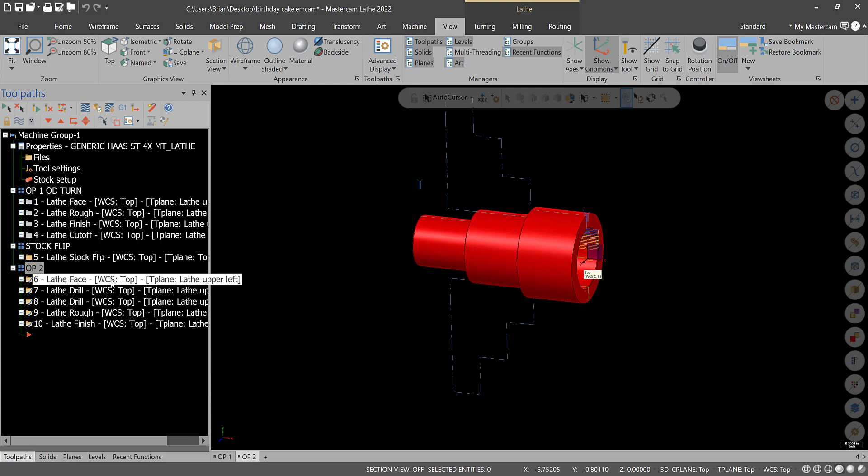So let's go to these operations here, select them all, click and drag them down, so that they're separate. Now this will be renamed stock flip, and this will be renamed op2. So now it's much easier to select op2, view sheet, verify, and you see what's going on. Looks good.

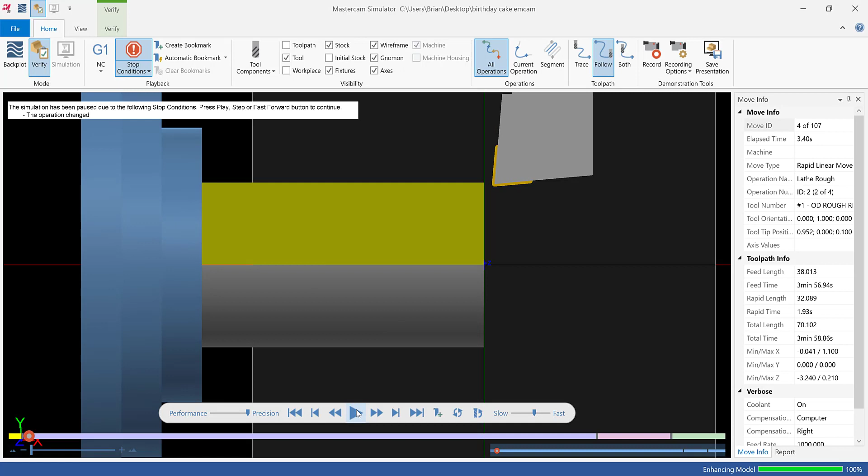Okay, then if you want to go back to op1, put the cursor here, hit the op1 view sheet, go to verify, and there's all the OD work—finishing, parting. Okay, so that's about it for this one.

Again, your organization as far as what you're viewing is a little different than the mill. So this is op1. If you want to go to op2, bring the red cursor below it and go to the op2 view sheet. If you want to go back, bring the cursor below op1, go to the op1 view sheet. Where the red cursor is kind of goes through the chain of how the stocks disappear.

So that's really it for this one. Make sure you separate the stock flip. On one of the other videos you'll see I automatically do that, but I wanted to give a reason why—that is the reason why. Watch out for that update stock option. That could curse you because it's not really in your face. So just leave that alone, leave it on update stock, and watch your cursor.

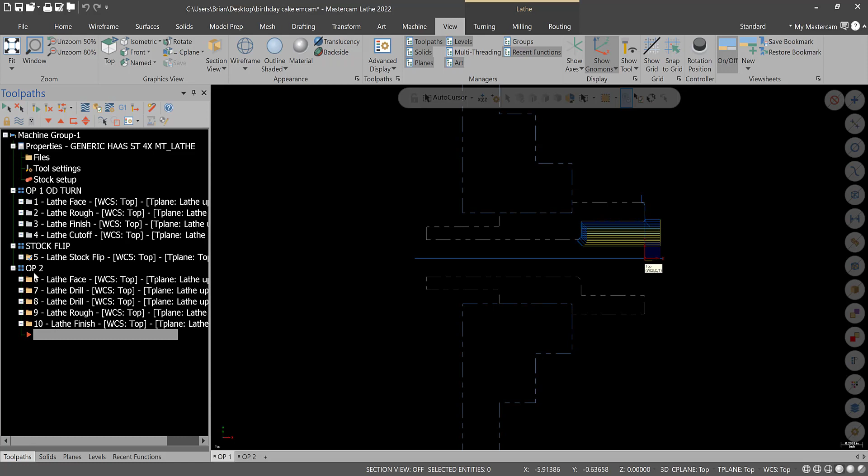So again, if we go in the bottom here to op2, verify—looks good. OD turn. Bring the red cursor up, op1, verify. We're all set. And again, as far as your toolpath simulation, just turn them on or off as you normally would.